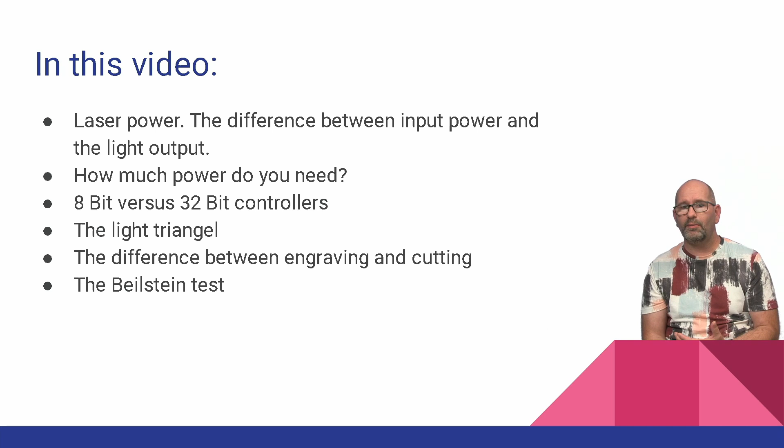And the last thing, but very, very important, the Beilstein test. If you don't want to die because you are using lasers, then for sure you have to know what the Beilstein test is. I made a complete video about it, and I will link to that later in this video.

Now, the first thing to know is the input power versus the actual light output. Most companies that make diode laser machines are not really telling you the real power output of the laser machine. Or sometimes they do, but it's hidden somewhere. For example, the lasers that I work with on my channel are 20 watt, 15 watt, that kind of power. But for real, they're not, because my 20 watt NEJE machine is actually only 5.5 watts in laser output power. And the same goes for my Ortur Master lasers, which are really 4.5 watt instead of the 15 watt that they claim to be.

So the 15 watt or 20 watt that you see on the website when you're buying such a laser is actually only telling you how much power the complete machine consumes. This means the motors, the controller, the other components in the machine, the heat that is generated, all those things are also calculated in the power that the machine consumes. But the real output power, the power you can use to cut or to engrave, is most of the time limited to a quarter or a third of the stated power.

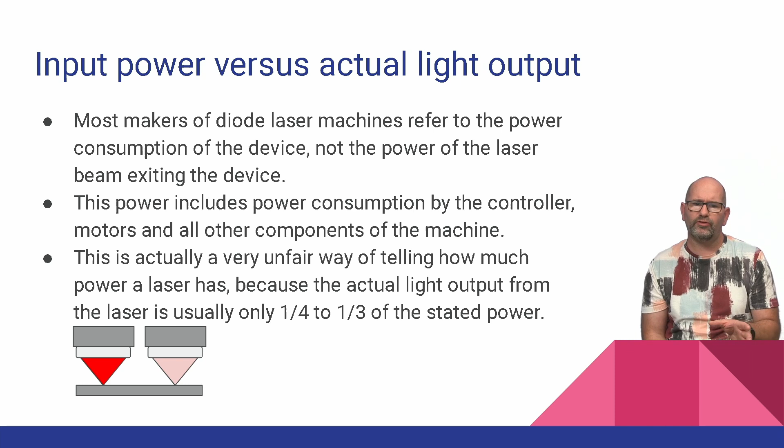But then the question arises, how much power do you actually need? Well, this determines the kind of laser you are going to buy. There are multiple things that determine the effect that your laser has on the material that you are going to engrave or cut. There is the power of the laser, the travel speed of the laser, how many times you are going to repeatedly cross the same path, and the color or wavelength of the laser. Those are all influencing how effective the laser will be.

So let's start with the power of the laser. The more power you put into the laser, the more heat the laser will transfer into the object that you are engraving or cutting. Now, some objects that you are working with cannot be too hot or they will break or catch fire. For example, if you're working with felt or paper, it's very easy to make them catch fire. And therefore you need to lower your power to the power you actually need to write or cut on that material.

Now, it's a good thing to test which heat, so which power, you can use for your material before you kill your object. So before paper catches fire, like you saw in my last video where I engraved something in a glass. The paper in that glass was catching fire just because my power was just a little too high. This is something you need to know, and you can set it in your machine settings.

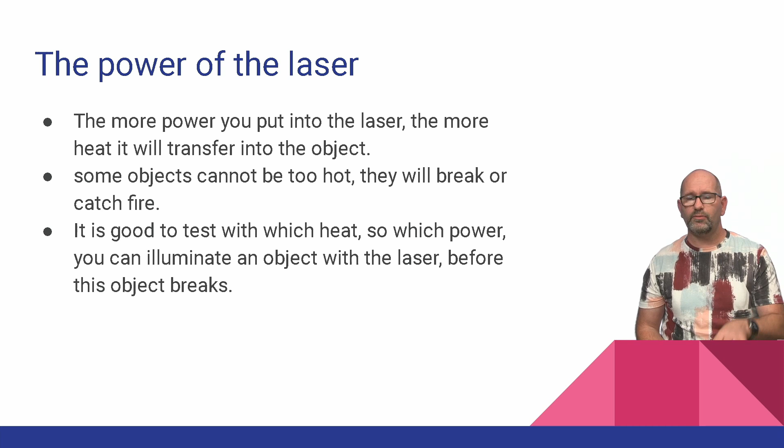Now, a second way to control the amount of heat that is generated on the material that you are engraving or cutting is the travel speed. The faster the laser goes, the less heat it will produce on the surface of the material that you are cutting or engraving.

So if you need more heat, well, you need to go slower. And if the material is catching fire, well, go faster, because this also determines how much power will be absorbed in the material that you are engraving or cutting.

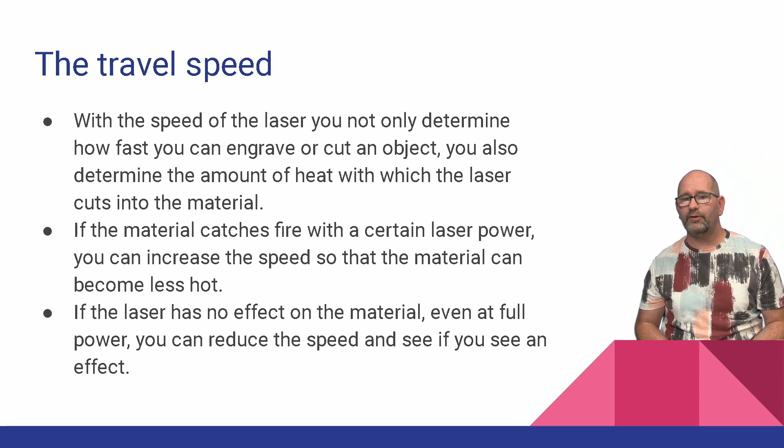Now, the third thing that will determine if you can cut, for example, a thick piece of wood is how many times you are going to be repeating the steps over and over again. So if you are engraving a circle in a piece of wood, then the first time you will cut 2 millimeters deep. The second time you will add, well, maybe a millimeter to it. And the third time you will add maybe half a millimeter to it.

But if this material was only 3 millimeters deep, then the first time you wouldn't have cut the complete circle out of that wooden board. But the second time, well, maybe you have, and maybe on some points you don't. And in the third time, well, you're completely through the material.

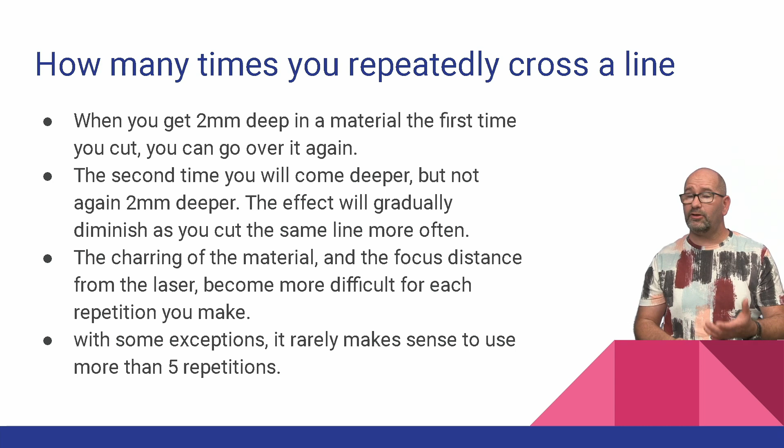Now, you will see that the more times you are going to repeatedly cut the same object, the less effect it has. And therefore, many repetitions rarely make sense. But I think 5 repetitions, something like that, will make good sense, because anything more won't work, because there is a lot of charcoal there where you are laser engraving, and your laser will be out of focus, which we will talk about a little later in this video.

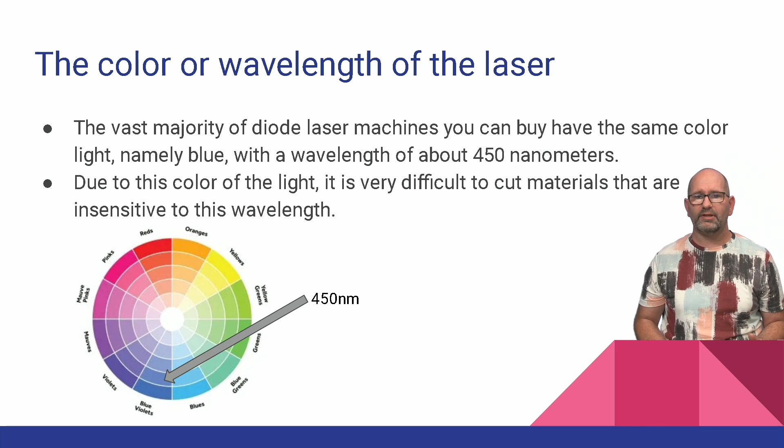And now the last thing is something you can't change, but you have to know it. The wavelength of most of the diode lasers that we are using and that we can buy on all the websites is 450 nanometers. And this means that it's kind of a blue color. And well, it's a type of laser that can cut certain things, and certain things can't be cut with this laser. And you have to deal with it. So there is a bit of acceptance. You have to know what your laser will cut.

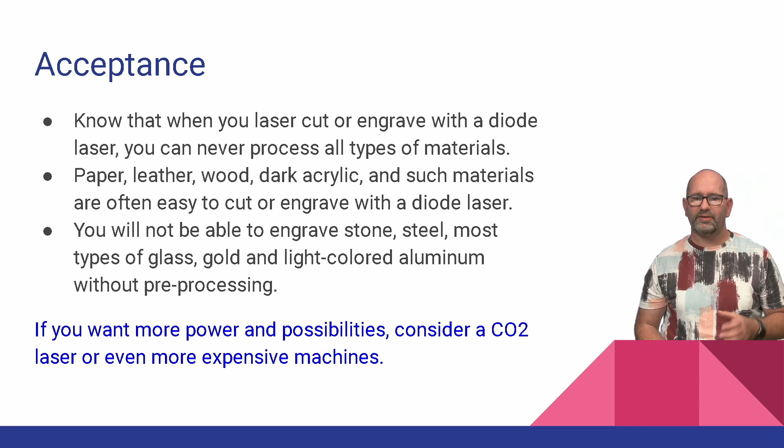So paper, leather, wood, dark acrylic. Such materials are very easy to cut or to engrave with a diode laser. But you won't be able to engrave stone or steel or most types of glass. Well, you have seen in a previous video that I engraved some glass with my laser. But normally it will be very difficult to do so.

Now, what's the real difference between engraving or cutting in materials? It's really important to know. When you want to engrave in things like wood or cardboard, most of the time people are engraving in wood, then you need a lot less power than when you are cutting. And also you will need to dose the amount of power very, very much. And the better you can dose the power, the better your engraving will be.

While if you are looking for a machine that can cut, for example, acrylic or paper or cardboard or wood or that kind of thing, then you want a whole lot of power and you want to have it transferred in as much heat as possible within a certain time. So the controlling speed and the laser power then determine how deep you can cut in materials. But for engraving, you really want to dose a very, very small amount of power onto your material.

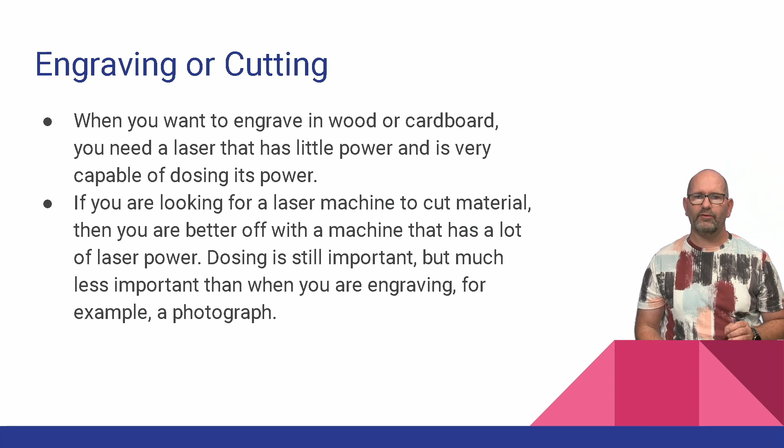And this is where 8-bit versus 32-bit controllers come in handy. Because a processor that works with an 8-bit way of calculating things can only control the laser in 255 steps. It's 256 of course, but 0 is laser off. And therefore there are 255 definitions of how powerful the laser is. Now, when you have a 32-bit processor, it can do many more steps. Really way too many steps, but that processor will be way faster.

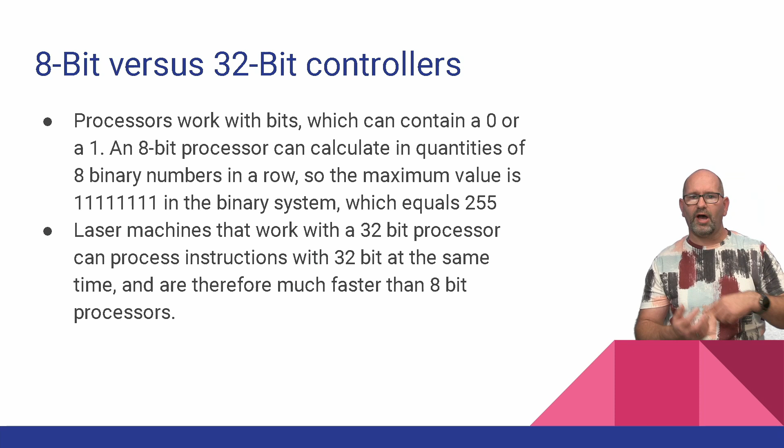So there are two things. The one thing is that you can't control your laser in more than 255 steps, and I will explain later what it does. And the second thing is that the processor is slowing down the complete machine if it's an 8-bit processor, because it can't cycle through the G-code that you have for your laser that fast.

In theory, a 32-bit processor would also be able to control the laser power in very small steps. Where an 8-bit processor can only subdivide the laser power into 255 steps, a 32-bit processor could make, well, sorry, I'm not going to number that because it's a giant number and I don't know how to say it in English. But it's incredible. But this is completely unnecessary.

Normally the lasers that have 32-bit processor boards are working with 1000 steps to increase or decrease the power of the laser. So they made it smaller than the processor could handle, but 1000 steps is 4 times as good as an 8-bit processor can produce. So therefore, if you are going to engrave things, an 8-bit processor is less good than a 32-bit processor because it has way more grayscales to engrave, for example, a picture.

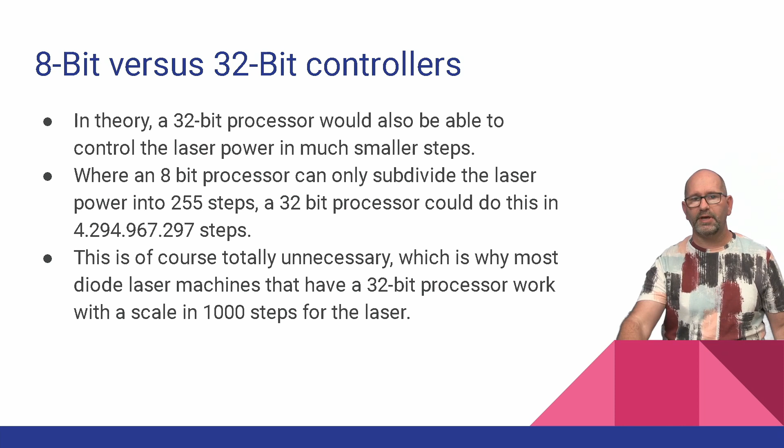So when you are engraving things, it requires a small cutting depth, so very little power. Also, it requires a lot of nuances between the deep blacks and the color of the material that you are going to engrave. And therefore, for example, a 7-watt diode laser has only 1.75 watt of actual light output. Remember that I told you that about a quarter of the given power really is transferred into light. And therefore it's only 1.75 watt of actual light that you can use to engrave.

Now, with an 8-bit laser machine, you can subdivide that 1.75 watts that you have in 255 gradations, and each of them will be 6.8 milliwatts big. So every time you go one step deeper with the grayscale, it's 6.8 milliwatts of more heat that is going to be transferred into your material.

Now, if you have a 32-bit laser machine that does 1000 gradations of grayscales when working with the same laser diode, it's a diode, not a tube, then it can subdivide that 1.75 watt into 1000 gradations, meaning that each gradation is only 1.75 milliwatts, and therefore it's 4 times as small. And you can imagine that you have a lot more grayscales, and therefore your black and white or grayscale prints will be a lot better when you have a 32-bit machine instead of an 8-bit machine.

Now, the light triangle is a very important thing to know, because a light triangle is the light that comes from the diode laser, and on the top where it leaves the lens with which you focus the laser, the light is very wide. And then it goes down to the point where you have focused the lens, and there it has a lot of power.

Now let's take a look what this power means. When you have a good lens on your laser, and most of the time those lenses are pretty good, and sometimes you can even buy better lenses for them, a good lens can project a dot that has a radius of about 0.1 millimeter, and this means that the real object that you are heating up is 0.00785 square millimeters. So it's really small, and this is where all the heat that comes from the laser will be transferred into burning power for your laser to burn or cut.

Now, if you don't set the focus right, and you have, for example, an object that is lit of about 1 square millimeter, then this is 10 times less powerful. So just being a little bit out of focus, too deep or too high, as you can see, here it is, really means a lot for the power of your laser.

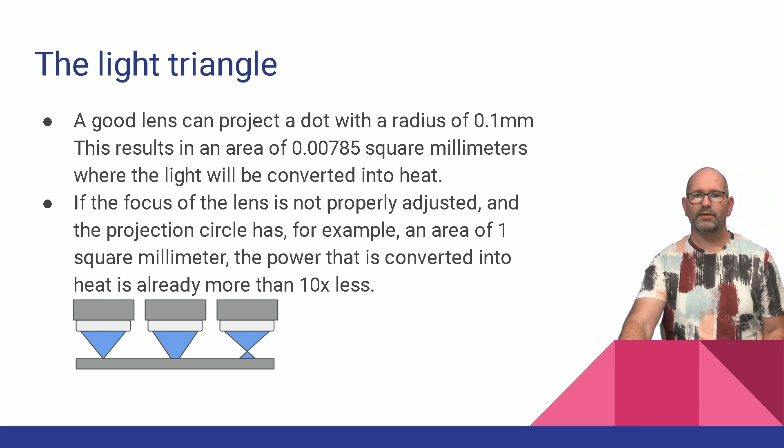Now, when you are cutting, as you can see over here, you need to focus in the middle of the material, and you need to be as far away as possible, so you need to have the maximum focusing distance from the material that you are cutting. And the reason is very simple. You have to go as deep as possible.

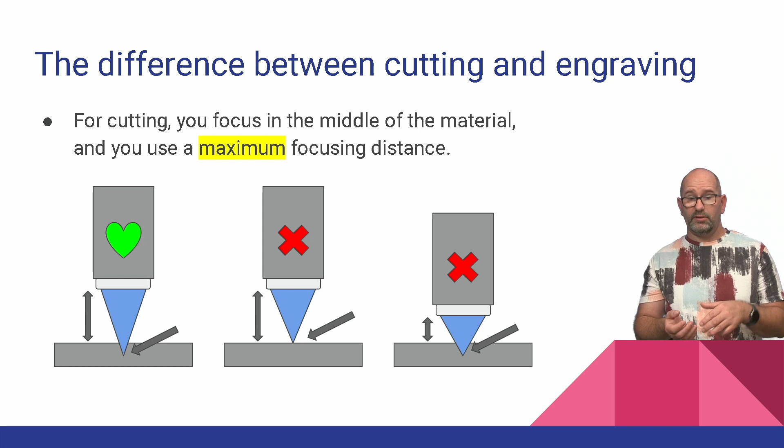Now again, as you can see, the farther away you are, the better it will be. And if you are focusing on the top layer of the surface, you won't get that deep cut. You will get a nice engraving, but not a cut. And if your laser is way too close to the material, as you can see here on the right, the material will be cut, but it won't be that deep because the angle is way too shallow.

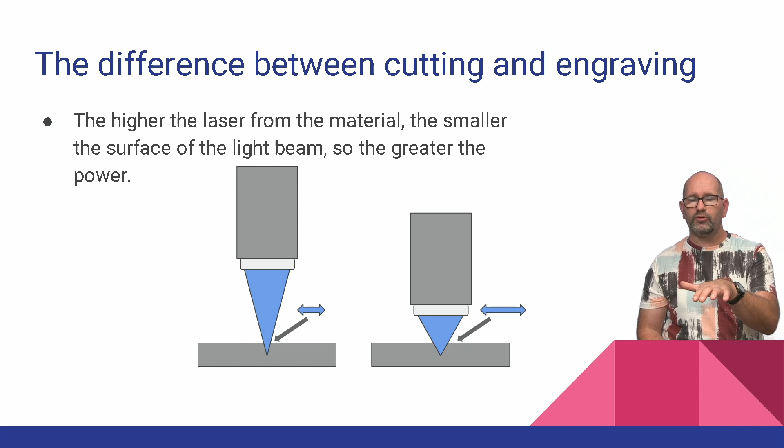And here you can see what happens when that angle is too shallow, because at the most left drawing, you can see that you can cut very deep, because even at the surface and also at the bottom when it's going through the material, it's still a narrow beam. While on the other one you see here on the right, the beam is way more wide, and therefore a lot of power will be lost on the top surface of the material, but also on the bottom surface, and you won't get through it.

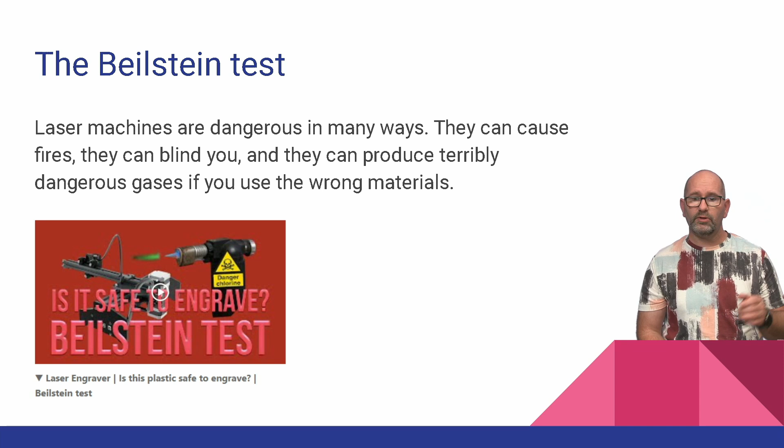So please be wise and know what the Beilstein test is. And if you don't know what kind of material you are working with, perform the Beilstein test. It's a very easy test. Go and see that video, it's a very important thing to know.

Now everyone, thanks for watching this video. I hope you learned a lot, and I hope you will make better engravings and better cuts with your laser engraver or laser machine that you have.